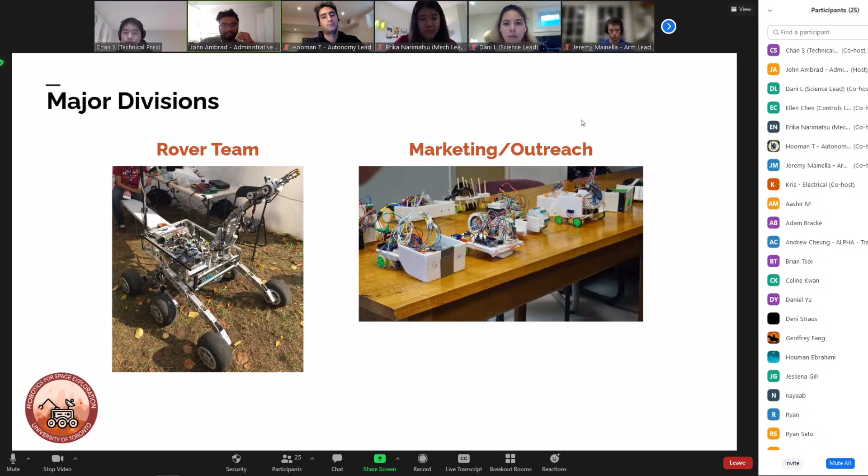Yep. Okay. Yep. Slide. Yep. Okay.

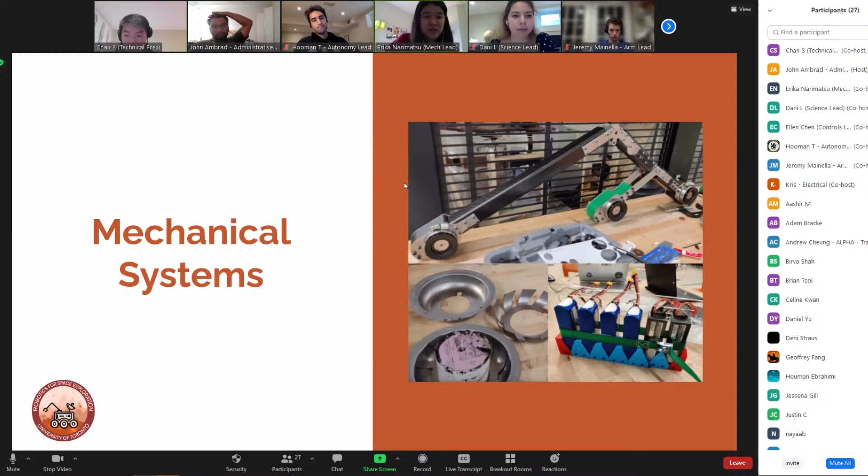Great, okay, so let's move on to the next slide for mechanical systems. So most of our work is the actual physical work that we do for the rover, like all the physical components. That would be the rocker bogie suspension, which is the drive mechanism. It's what keeps our rover able to move over different terrain and adapt better to the Mars environment, or I guess the desert environment in our case.

The wheels are all custom made in-house. We do everything from the design to the manufacturing with our sponsor, so that's one of our big hands-on projects. We look at different tire designs, tire treads, materials and sizes, so we can adapt it best to the desert. One of the big challenges there is grip, and the balance between grip and speed and turning ability. The more the grip increases, the more our turning decreases, because we're gripping too much on the ground. So that's one thing we've had trouble with in the past, and that's one thing we're looking to improve a little bit more. So that's one of our big projects.

The battery bay - we work a little bit with electrical on doing some of their more hard physical components. The battery bay was one big one, something to house all our batteries and their circuit boards. So making something very secure, something easy to open and close, and something that's easy for us to use in competition while still being very robust and strong.

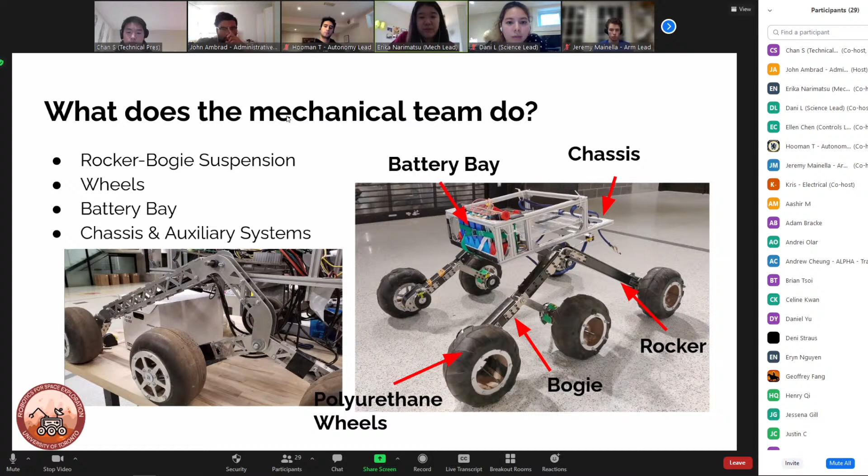And the chassis also attaches to the arm, so it takes a lot of force and weight from that, so we have to make sure it's very stable and robust. There's also a differential bar, which is part of the chassis system, which keeps everything relatively level, relatively parallel to the ground, even if we're on a really big rock or something with an incline. So that's also one of the big mechanical projects. And yeah, if you want to go to the next slide.

Our design phases are pretty standard. We start with conceptual design and research in the fall semester, then move into detailed design during the end of fall and beginning of winter semester. We do a lot of 3D modeling in SolidWorks, and finite element analysis, which is basically simulation of forces and stresses on our mechanisms.

These are all very industry standard, so it's a valuable skill set if you're looking for a job or career in this industry. These are applicable skills we'll teach you over the semester and year. During winter semester, we do testing and assembly, so you'll go into the machine shop or garage and do hands-on manufacturing for what you've designed.

I think this is one of the most rewarding parts about mechanical team. You take something that was an idea, make it on SolidWorks as a 3D model, and later you're able to actually build it and bring it to life. That's one of the really cool things about mechanical team.

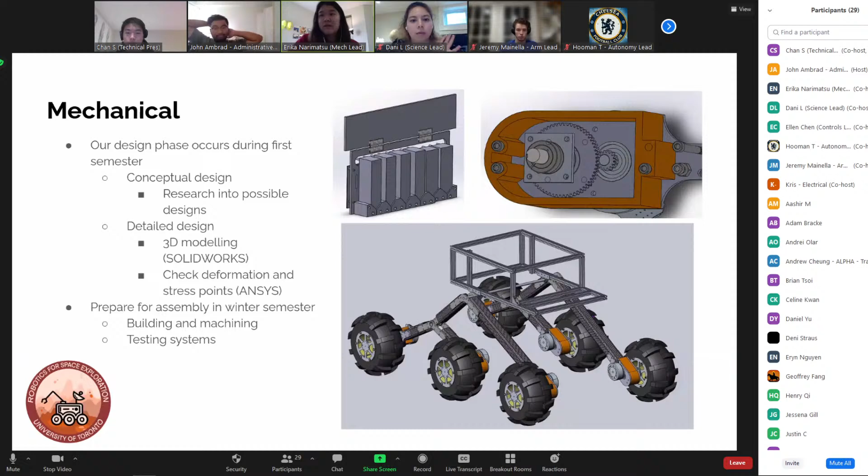So you have a lot of these tools in your arsenal. Really whatever you want to make is possible with our team, with the help of our sponsors. Whatever you want to do, you can bring it to life, and we have a lot of things that can support you in doing that.

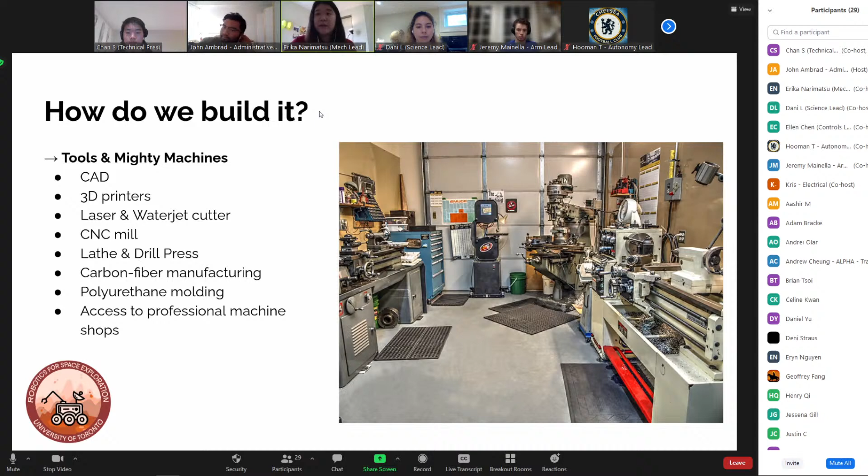As I mentioned earlier, you can expect to learn a lot of CAD and SolidWorks software skills in mechanical. These are all very industry standard. We'll be using Fusion 360 as well this year. With CAD and mechanical simulation software, you'll learn more about mechanical design principles like kinematics and dynamics, as well as hands-on skills for manufacturing and machining. We also use a lot of 3D printing, so you'll learn about different manufacturing techniques too.

That's kind of what mechanical team does. There's a lot of hands-on components. So if you like tinkering with stuff, working in person, and getting your hands dirty, this is definitely where you'd want to be, I think.

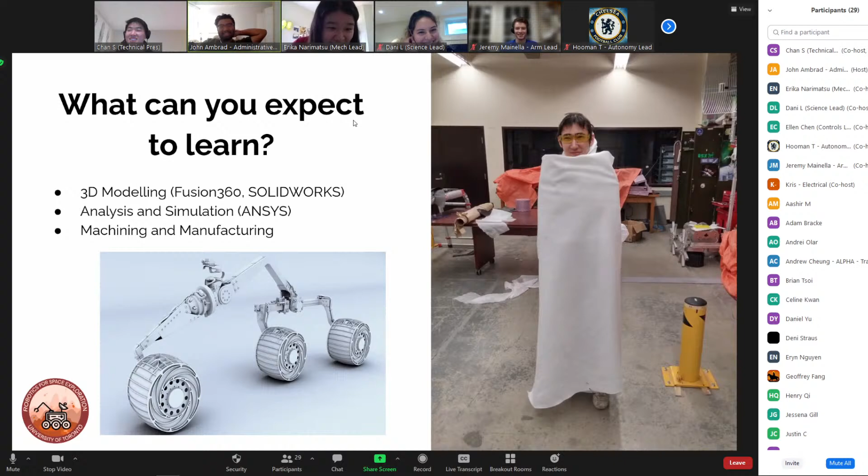What the... I don't know where that came from. Okay, that's not in the slides. Okay, alright, there we go.

Alright, I guess I'll take it from here. Hello everyone, my name is Dani. I'm an EngSci 2, aero option. I am on the science team.

So what does science do? Probably you can assume we do the science. We do scientific experiments in competitions. In all of our competitions, there's always a section that speaks to some sort of scientific mission on Mars. Sometimes it's analyzing Mars' geological or geographical features, but for the most part, our challenges involve collecting soil or rock samples and analyzing them, usually for evidence of life or lack thereof.

To give some insight on past science missions, RSX competes in 3 different competitions: CIRC, ERC, and URC. For ERC and CIRC, the mission changes every year. In 2020, CIRC's mission was to investigate a promising region and evaluate it for long-term or temporary settlement, which involved analyzing samples and conducting research for a specific metric.

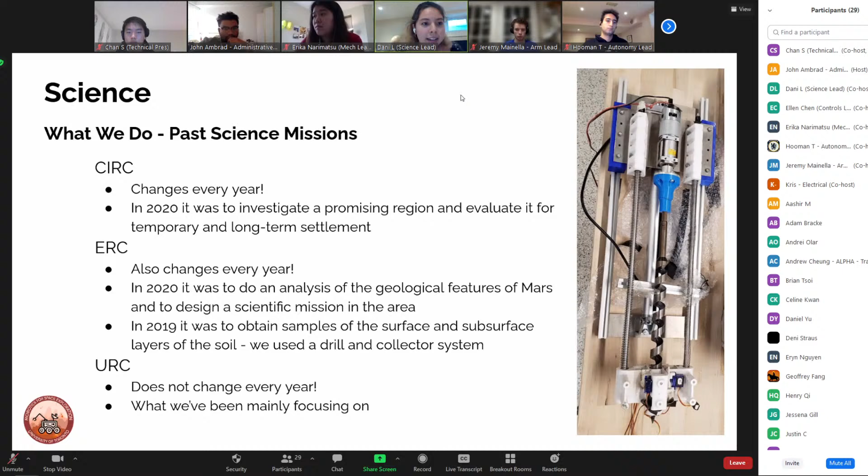So what is URC? URC's science mission is to conduct in situ analysis on some rock samples and some soil samples to detect if there is life, if there was life, or if there's no life in the given sample.

Based on our research, we've come up with a couple experiments, but we want to highlight our main two, which are microscopy and fluorescence for FAD. Microscopy is pretty self-explanatory.

We're just taking a microscope, attaching it to a camera, and looking at the samples for anything that looks like a cell structure, so anything that looks like life as we know it. I actually have our microscope camera system here. Looks pretty cool, kind of expensive.

The second one, fluorescence for FAD, is a little more complicated, but still relatively easy to understand. Essentially we're searching for FAD in samples. For those who don't know, FAD is a coenzyme involved in the electron transport chain, and it helps boost the efficiency of ATP generation. So if we see FAD in a sample, it's a pretty good guarantee that there's life within that sample.

Our experiment is to essentially excite the sample based on the excitation spectra of FAD, and we know what it should emit if there is FAD in that sample. We have a PMT that absorbs and recognizes any of those photons that should be emitted if there is FAD within that sample. That being said, we can detect if there is life within soil samples.

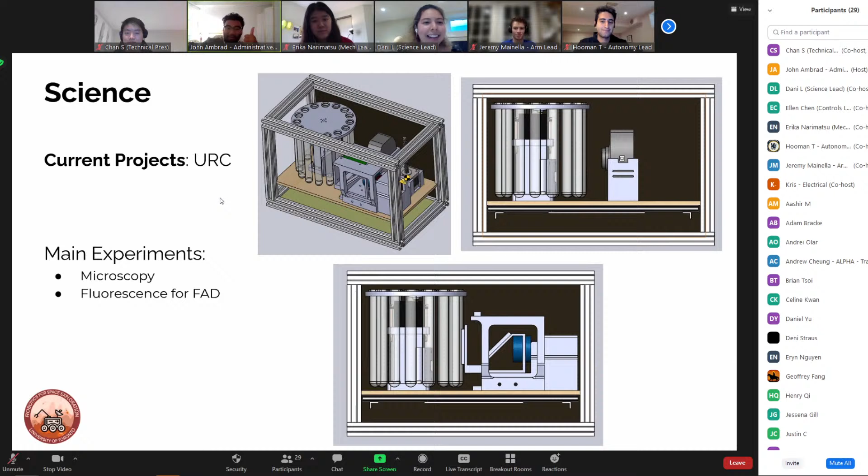Those were our main two experiments, but we also have some other ones. I won't go over them because they would take too long, but essentially we're just either looking for fats or proteins. With these experiments, we just need to look for a change of color, and we know that there exists those within that sample.

Those have been the projects we're currently working on, but there's still a lot of work to do for science. Like I mentioned, URC and ERC change every year, so when those rules come out, you can expect to be working or starting a project from scratch. You'll be able to do your research, do the entire design process, then build the system to carry out these experiments, which is really exciting.

That being said, for URC, we're still not done. We still have a bit of research to do. The experiments I mentioned are for URC, but they're more for soil samples. For URC, we also have to collect or analyze rock samples, so we're doing some ongoing research on how to analyze for extinct, extant, and absence of life on rocks.

Lastly, we also will need to physically build our experiments. We have modeled and designed our system, but we have not gone in and actually put the things together since it's been virtual for the past year. So you can definitely look forward to bringing your mechanical engineering skills out and doing some physical design work, in addition to coding our hardware for our motors and pumps to work. So we'll need to do some coding there.

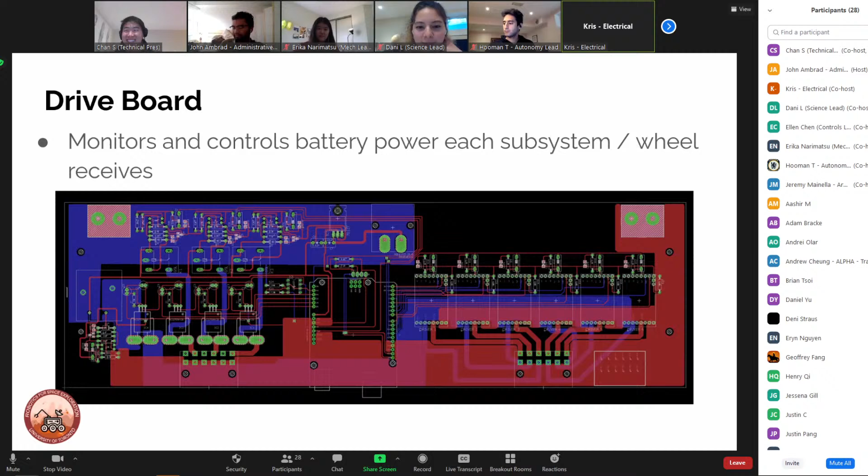We then have our low power board, which is used to step down the voltage for different components of the rover, since they may have different power requirements.

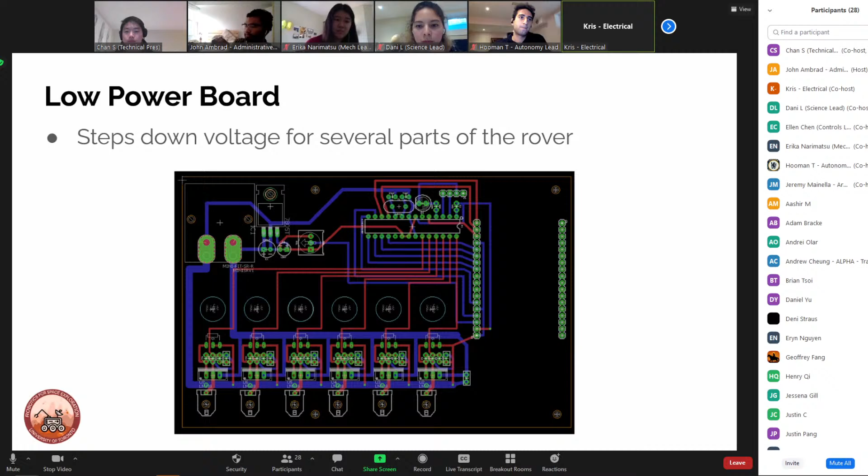And lastly, we have the ARM board, which takes input from an onboard computer in the form of electrical impulses and translates the signals into commands for the motors, things like rotating, gripping, and extending the arm.

So the footprints you just saw are all PCB designs, and I guess it's much more interesting to manufacture them and see the real physical PCB that you can hold in your hand. Sorry, I was confused with the arm. But yeah, this is just a footprint - once you get to see your design in reality, it's a much better feeling.

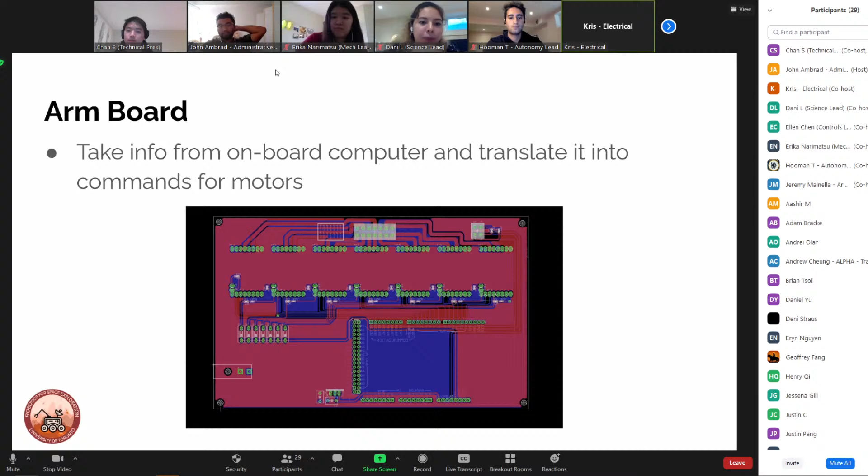So what exactly will you do? When you receive your first project, the first thing you'll do is scope the problem down to understand the functions of a particular component and limitations it might have in terms of how much power it needs, or current and voltage to be supplied.

Then you'll do your own research into selecting feasible chips and select one that satisfies most of your requirements. Then you'll begin to design your circuit for the chip and create a footprint or layout for the PCB in Altium software. Then the design will be manufactured once it's passed all the design rule checks, and you basically assemble and solder all the components onto your PCB.

And this year, we also hope to give members more in-person hands-on experience with important circuit components and tools such as resistors, diodes, capacitors, multimeters, breadboards, and much more.

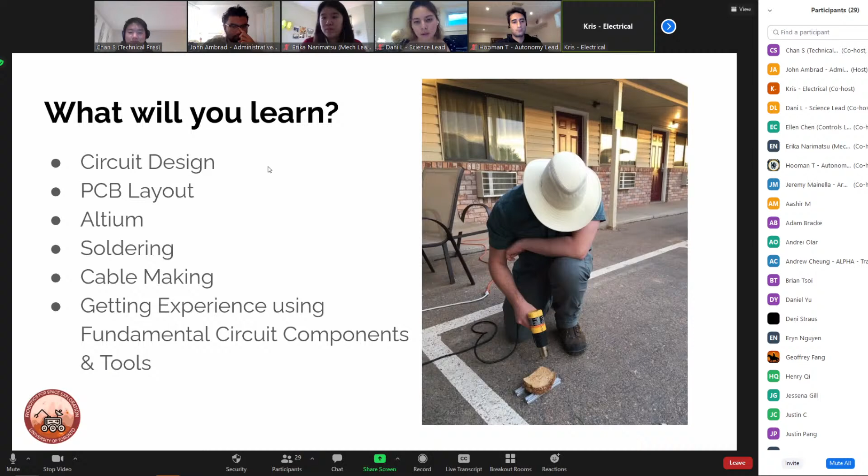Next slide. Kris, is that a breadboard? Yeah, I mean, it's just an image, but the guy was just drilling into a breadboard.

So I'll just briefly mention the new projects for this year. They include the backplane board, power combo board, and new arm control board. Once you join the team, you'll learn more about what they are.

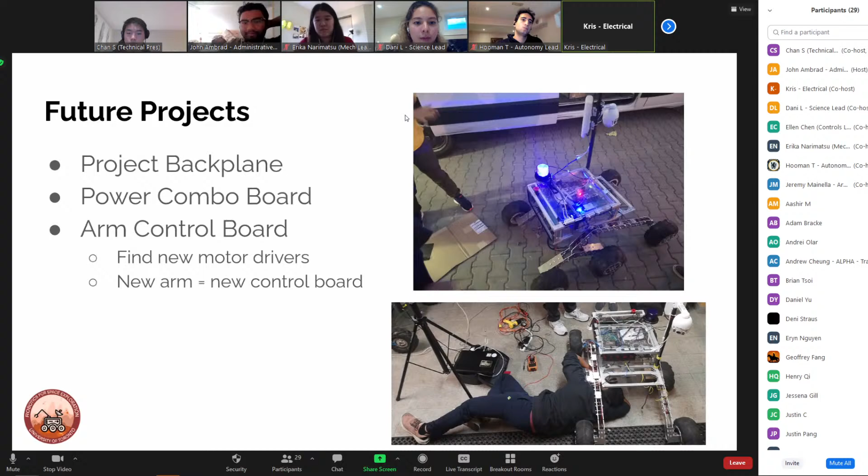In terms of timeline, we'll first provide all the necessary resources to learn the circuit design software and provide training for how to safely use the various electrical equipment we have. Then you'll be working on projects throughout November and December. Hopefully we'll have our designs manufactured in January and February. We'll then assemble the electrical system in March and test the PCBs for competition, and lastly document the new projects before entering competitions in the summer.

As you can see, by the color code, you can expect to have work intensify mostly in January, to avoid having too much work during fall semester exam season or work ramping up in March and April in the winter semester.

If you're thinking about electrical, you absolutely do not need any electrical engineering knowledge. We will provide all the resources you need. We hope that the technical and hands-on projects will help you design your own PCBs for your own personal projects, and that you get an appreciation for electrical engineering to be able to solve issues with, for example, hardware.

And lastly, in terms of tips, I believe the fundamental core of the electrical team is learning how to manage complexity and using abstractions to hide that complexity. You'll learn more about what that truly means if you do choose to work with our team.

So some of our current projects include creating a GUI program to combine map and drive controls into one program. This uses C++ and Python.

We also are aiming to enhance our manual rover drive system, making sure we have really smooth control of the movement of the rover. This includes smooth acceleration and precise turning, which are really important when we're navigating through rough terrain in our competitions.

In addition, we have an ongoing project that aims to simulate the rover in rocky terrain with Gazebo. So overall, we have a pretty diverse set of projects, and there's definitely something for everyone if you decide to join the software team.

In this team, you'll definitely learn a lot of things that you can use in the future, whether it be other design teams, other classes, or other jobs in the industry, especially in robotics research.

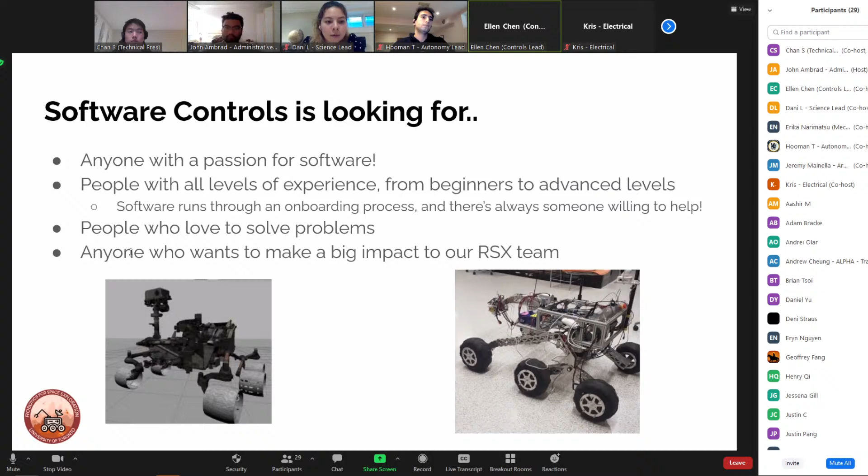And I'll pass it on to Hooman to talk about the autonomy team at RSX.

Thanks, Ellen. So yeah, first off, I'm Hooman. I'm the autonomy lead. I am a first-year Master of Science student at UTIAS over at the Space Flight Laboratory, and I graduated from computer engineering at UofT last April.

Now with that stuff out of the way, let's just get into the autonomy, software autonomy stuff, the cool stuff. So if you could go to the next slide, please, Adrian.

In the competitions, the autonomy task is essentially a task for the rover to be able to autonomously traverse to posts or between gates through various types of terrain, like easy or moderately difficult terrain. And so in order to do this, the autonomy subsystem, we're implementing this from the ground up, because it's the first time RSX is actually doing this.

For that, we're having a proof of concept implementation by means of the mini rovers, which is the picture you're seeing on the right-hand side. And because it's a ground up implementation, that means there's going to be a lot of work in this area, because we're doing everything from scratch without too much experience from before. That is what this mini rover is intended for.

It's because we don't have too much access to the rover and we don't want to try autonomy algorithms on the actual rover. We're using this mini rover to test out our algorithms to make sure that our SLAM works, or whatever works. So if you could just go to the next slide.

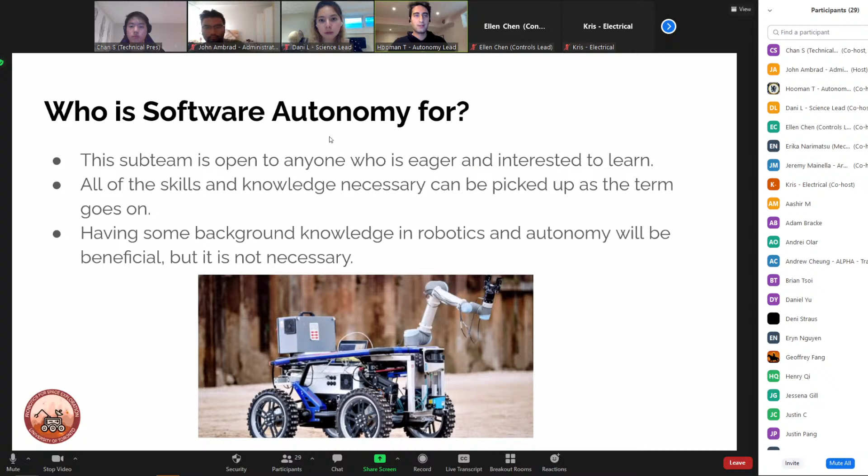Before I pass it off to the ARM team, I'm just going to go over a quick technical demo, which isn't really a demonstration of anything. I'm just going to show you some stuff, which will include going over the mini rover, one of the mini rovers, and highlighting some key components, as well as the Ouster LiDAR that we have and the Jetson Xavier.

So I'll just start off with the LiDAR. This is an Ouster OS0-32 LiDAR. It's quite an expensive bad boy, and we're lucky enough to be able to play with it this year. This thing is capable of doing 3D mapping of its surroundings.

3D mapping of its surroundings. Basically, there's going to be some lasers that get sent out from either side in all 360 directions, and it's going to map some field of view this way. You're going to get that information on your NVIDIA Jetson or whatever computer you're using, and use that to know the depth of the stuff that's around you.

What am I going to do with this information? How am I going to imbue the rover with some intelligence that's going to enable it to traverse through difficult terrain? So that's one thing that we currently have and are working on.

The other thing I mentioned is the NVIDIA Jetson Xavier. This is a little bit more powerful version of the Jetson Nano, and it's capable of doing things we will need it for with this LiDAR. The spec sheet is available online, but to give an overview, it has a bunch of different types of cores, a bunch of CUDA cores, and a lot of RAM, 8 gigabytes. It's going to be useful when we're doing intensive computations that require such computing capabilities.

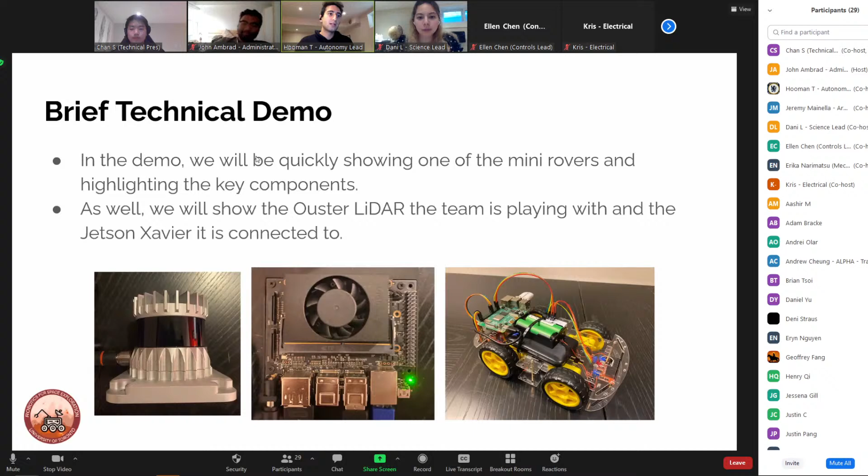Awesome, thank you. So yeah, as Milan introduced, my name is Jeremy. I'm a Mech 2T3, and I'm the ARM team lead. So just before we go to the next slide, a little introduction to ARM. Take a summary, the general gist of all the other subgroups or subteams you've just heard, and mash it into one giant robotic arm, and you have the ARM team.

Hello? Oh, thank you. So yeah, what do we do? We build an arm that does a lot of the manipulation, a lot of the tasks for the rover at all of the different competitions. I know, for example, at the URC, there's an entire panel that we get to play with, which is really fun.

We mostly deal with the electrical circuits for the arm, again specifically for the arm, communications and software for the arm, and mechanical design for the arm. Everything we do that involves other fields—software, electrical, and mechanical—is all related to the arm. We're our own little island, but we have a lot of communication with all of the other design teams.

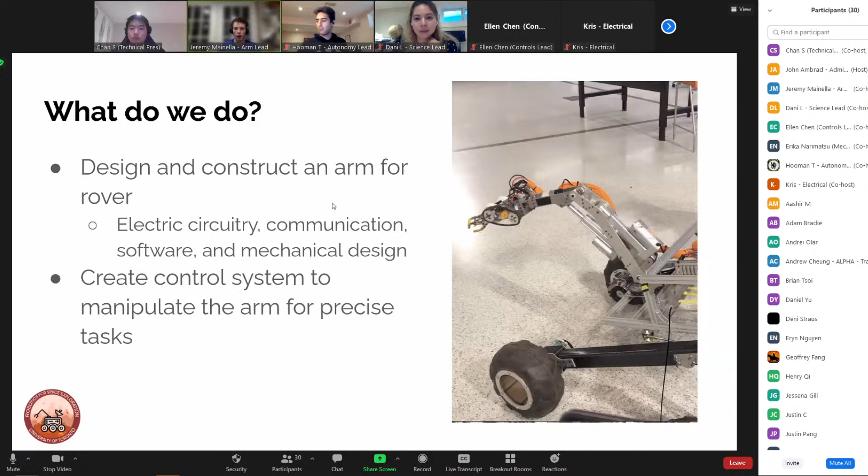As I mentioned briefly earlier, there's a few different tasks that the ARM does, specifically for the URC. Equipment servicing involves a giant control panel meant to emulate a rocket ship's control panel, with dials to turn and levers to flick. There's even a task where you grab a screwdriver with the arm and tighten a bolt, which is difficult when maneuvering a 5 or 6 axis robotic arm to line up and turn a tiny screw. We have entire documents, sheets, and Google folders dedicated to the design process, what materials and motors we can afford, fit within our weight limit, and know how to use to accomplish these tasks.

The other challenge is extreme retrieval. This works in partnership with the rest of Rover, because we have to go over rough terrain to retrieve, I believe, a water bottle of sorts. I've actually never been to the competition myself, but hopefully that'll change this year. We retrieve a heavy object, so not only does the arm have to be precise, it also has to be very strong.

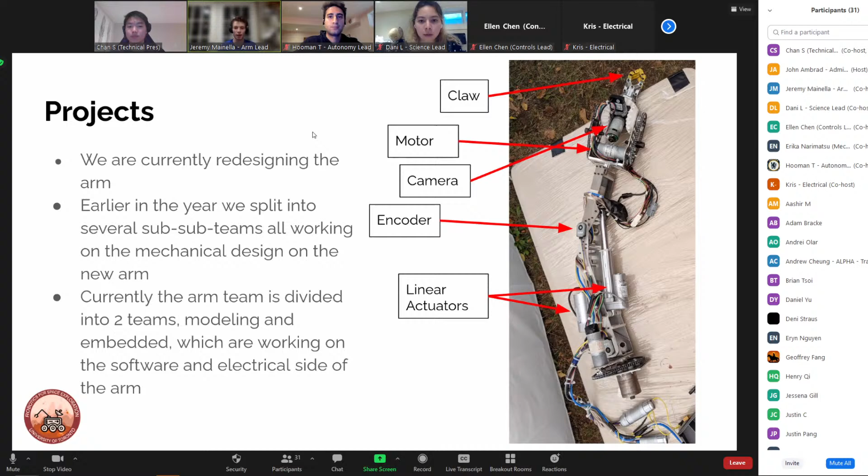So is the ARM team a good fit for you? I'll just say yes, because we have a large variety of things you can work on. Even if you're not super fond of something, maybe you think, hey, I'd like to give this a go. Or maybe you're really good at mechanical design but interested in electrical or software - ARM team is a good fit because you can get a taste of that without going into too much detail, and you still get exposure to everything and work on a lot of different projects. There is absolutely no prior experience needed.

Please just come and join, and we will teach you whatever you need to know. Believe me, I'm on the modeling and embedded teams, and I know only a little bit about microcontrollers, and nothing about ROS, which is part of what we've been using for modeling. But we've been learning it over the summer, and it's been a lot of work, but a lot of fun too.

Another reason is we get to build things. You get hands-on engineering experience, which is hard to come by. And this year we should be doing a lot of it with the whole constructing a new ARM thing.

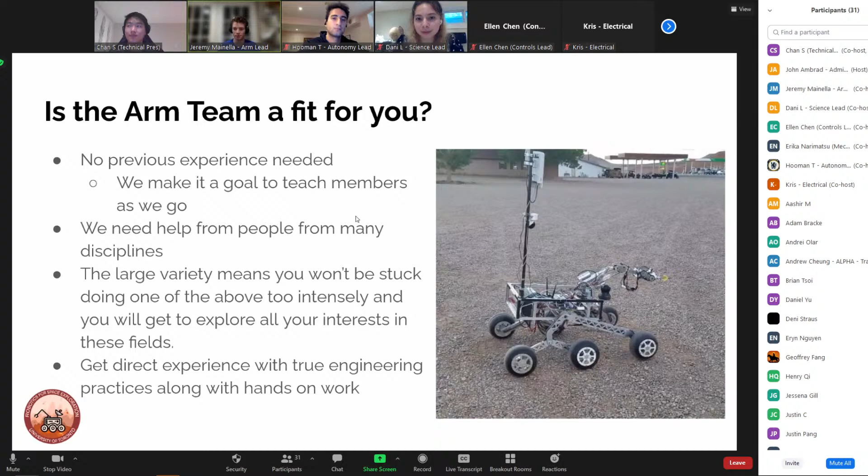If you want me to say a quick two seconds, I can, Jeremy. Yeah, please, quick two seconds. ARM team's the first team that I ever started off with.

I joined RSX in second year, and I've learned quite a bit. I went from a mere second year ECE with absolutely no practical knowledge and no way to apply it, to someone who was learning how to create a daisy chain to control an entire rover arm. I also got to go to different competitions all around the world and actually pilot this thing to pick up different objects, use it to turn dials, push buttons, etc., and learn some really, really cool robotics, and really cool math involved in robotics.

You can call me a nerd anytime you like, I will take the compliment. But ARM team is that kind of team where the intersection of all three aspects, mechanical, software, and electrical design, all meet, and honestly it is some of the most fun that I've had in my university career. Being on the ARM team is a great time. And Jeremy, I think, is a great leader. So, yeah, hey, thank you.